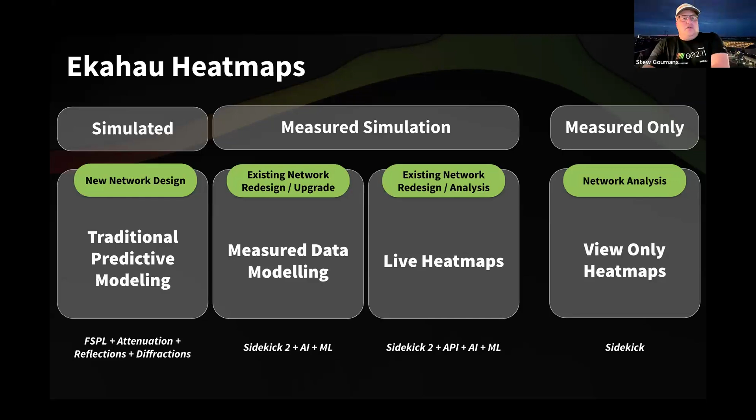So from an AI Pro Online perspective, we're going to cover a little bit about what some of the heat maps are that we got today. Now we've got two views that you can actually take advantage of within AI Pro Online. One is the traditional 2D view, which is super cool. It's got that flat view, the more traditional one you've always become accustomed to.

And then we've got our 3D view, which is even more super cool, right? Where now we can look at attenuation zones. We can look at the height of objects within that area, and then the placement of those APs, and then kind of pan around. And we'll dive into that as well.

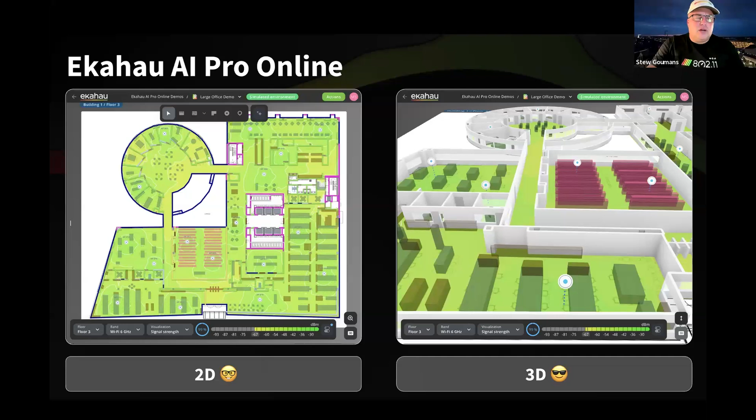Now, here are some of the new heat map visualizations that you'll see within AI Pro Online. Of course, there's our standard signal strength. This is where we're going to see how our APs are performing in a simulated environment, what the obstacles are and what it's going to look like. And you can even single those out by clicking on each individual access point. It shows you individually how each one is performing.

You've got your ever so popular secondary signal strength, which we'll talk about a little bit later in our inspection. But this plays a key role in roaming, right? This is how we make sure that we can actually pass along to the next access point. And our ever so popular SNR, which is our signal to noise ratio, and then our channel interference visualization. So these are some of the key core heat maps that we've got available. But Troy, I think we've got some even more in-depth ones here.

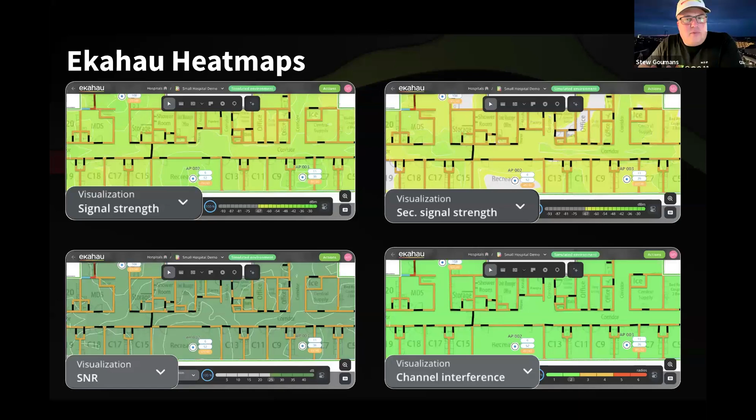Yeah, so we've added a few more visualizations to AI Pro Online. We've added a dominant AP visualization, right? And we'll show you what this looks like in a demo. But the high level concept here is that when you flip to this view, it'll show you roughly the coverage that you'd expect to receive from a particular access point, right?

Each AP's coverage area would be represented by different colors, which also ties into the co-channel interference view, where if there are too many APs lit up with the same colors, that could suggest that you have a co-channel interference issue. But it also shows you approximately the point when you may expect to roam from one access point to another. And that ties into another inspect feature that we'll show you a little bit later in the webinar.

We've also added the capacity visualization, which is super critical to designing modern Wi-Fi networks. It's one of the key considerations you should be looking at in order to deliver on the performance goals and targets for your wireless network. Now, there's a few different ways to look at it, and we'll dive deeper into these. But just to put some earmarks in the wall there, you can look at capacity in terms of overall throughput from a client device perspective, and you can also look at it in terms of number of client devices per radio, right?

And a couple of views that I find management or layer 8 are always very keen to look at. Things like data rate, right? This is the data rate, or the speeds and feeds, as advertised by the access point when you're putting together a predictive or a simulated design. And if you happen to be on site doing a survey, that data rate is what you're actually seeing from the access point.

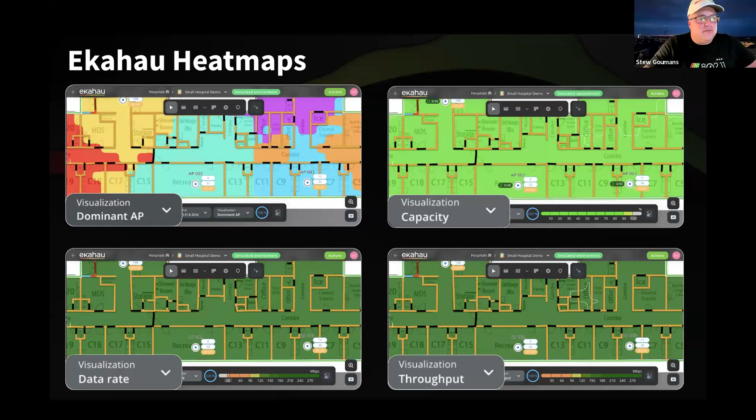Yeah, that's a great point, because as we segue into the tool of predictive modeling, when we look at the coverage, how do the objects play a role in that? It's going to play a role in the throughput as well. It's not just about painting the picture that the coverage is great, but we also have to understand a little bit more about how that free space path loss works, how that signal leaves the AP, right? And moves along that path.

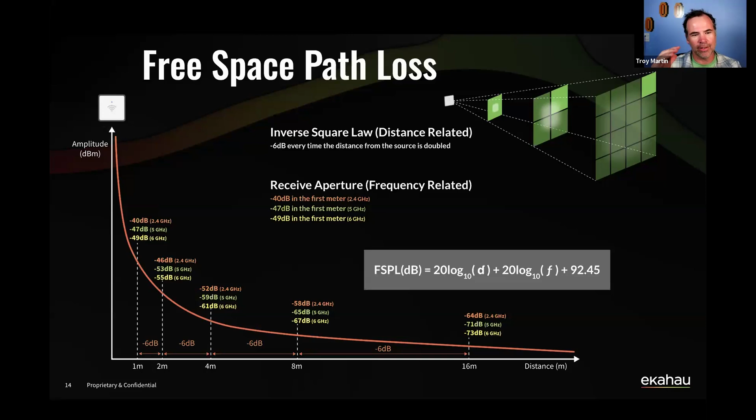Exactly. So there's a lot of deep concepts portrayed in this slide. So I'm going to try to take it at a high level and walk you guys through what's happening here. But the idea is if we imagine energy radiating out from an access point, as that energy propagates, the signal gets weaker and weaker just by covering a distance, right? So regardless of passing through any walls or bumping into any furniture, obstructions, anything in your environment, just by traveling a distance, that signal gets weaker and weaker, right?

And if you wanted to generate this graph via Excel or programmatically using a Python script or something like that, the equation that generates it is on the slide there, and it's purely a function of distance and frequency, right? It has nothing to do with the antenna type, antenna model, the shape or direction. The rate of decay of that signal purely depends on distance and frequency, which are two factors that you see in that formula.

And the other concept that you want to think about is something that we call the inverse square law. The way I like to describe that is if you imagine a balloon filled with air, and you keep filling that balloon with more and more air, its volume increases, covering a larger area. And as it keeps expanding, the material of that balloon stretches and gets thinner, right? So that surface area is being stretched over a greater and greater distance. So the inverse square law tells us that every time we double the distance, each surface area, if we represent that as 1 unit square, receives 1/4 of the energy.

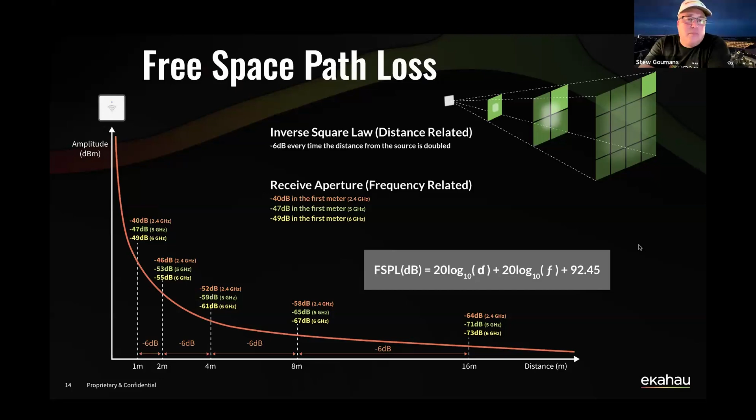Well, it's really cool. I mean, just going back to the calculation in it, we don't expect you to memorize this, but it's really cool that the actual math behind it shows how things leave and how that signal decays. And the effort that goes into putting that into the actual software itself, right? So there's a lot of math behind it, and we can appreciate that. And thanks for explaining that out, Troy, because you talk it all day long from a training perspective. So that was great. I love that.

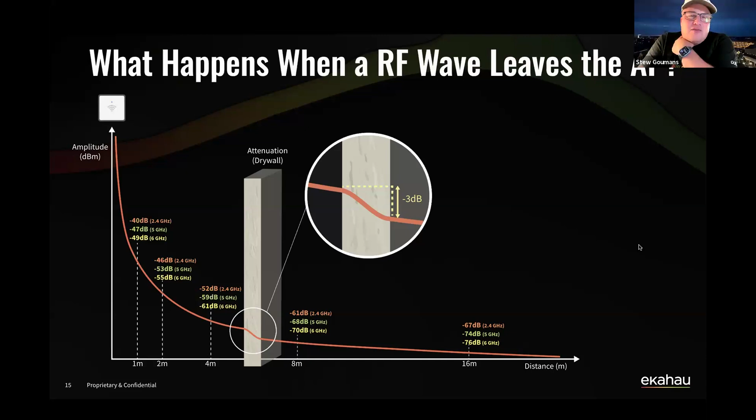Thank you. I mean, when we talk about the RF as well, when it leaves the AP, no two walls are alike, right? Because we have walls that are made of different materials. Some are denser than others, and some behave completely differently. So whether it looks like a standard wall, it may act like an elevator shaft, and it's not concrete. It's got other metal material in it, or it may have water, like a bookshelf.

Believe it or not, bookshelves contain water, because books actually have moisture in them, so there is a bit of a water content. It's not like humans where we're bags of mostly water, right? But no two walls are alike. And that's actually a good segue, I would say, Troy, just to show the overall what that actually looks like. So maybe we should spin over to our AI Pro online here and show you a couple of new things. So let's do that and share that.

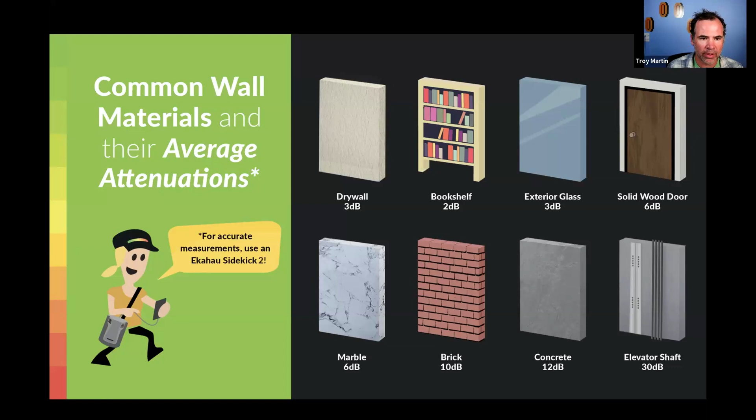Drywall, it's a really wild material. You can have drywall that may be just one layer of thickness, but some buildings they're putting in two or three layers, and you have that on both sides, right? So by default, Ekahau represents a lot of different wall materials. But it's a really good idea for you to go on site and actually measure those walls. Confirm, is that material actually a 3 dB wall, or is it something closer to 5?

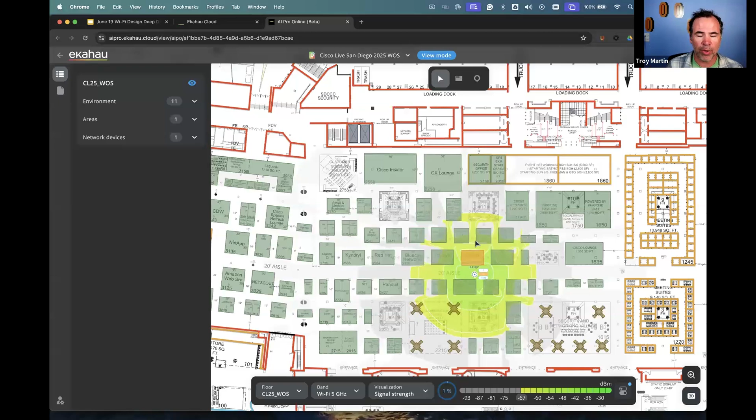Glass panes are very different as well. There's a lot of film that can be put in the glass, or metal that's melted in with the glass itself that helps it reflect the light to keep heat and things like that out. So especially glass panels on outside walls, they can be very high from an attenuation perspective. So it's always a good practice, if you have the ability to go on site, to measure those walls, and then you can use that measured data as part of your design to make it more accurate, make the model closer to the truth.

Speaking of models, what do you have here to show us, Stew? You're right. Yeah, so this is actually a mock-up we had for Cisco Live in San Diego just recently, and you can see you've got all the walls, with the floor plan of the entire World of Solutions, right down to the booth attenuations. Our counterpart Matt went ahead and got this all prepared for us, and hats off to him for getting this ready.

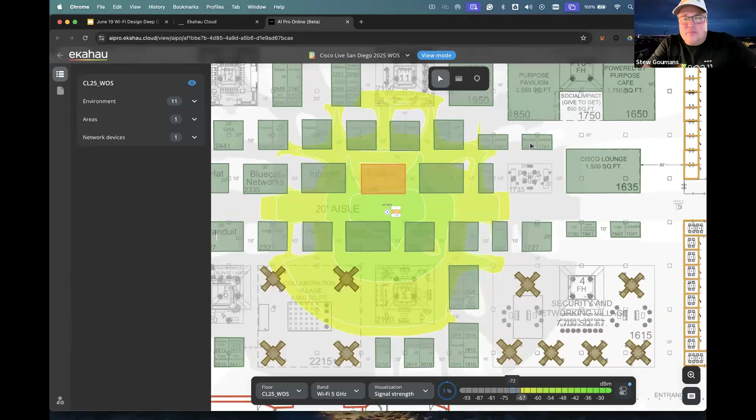But when we look at this, what does it look like from generally putting an access point in there? What does it look like from the attenuation? Let's take a look at these areas, these objects and booths that you can now create. So in this area here, from a wall perspective, Matt's labeled it as a booth, and he's put in some height and some attenuation, just to give you an idea of what to expect for the denser areas.

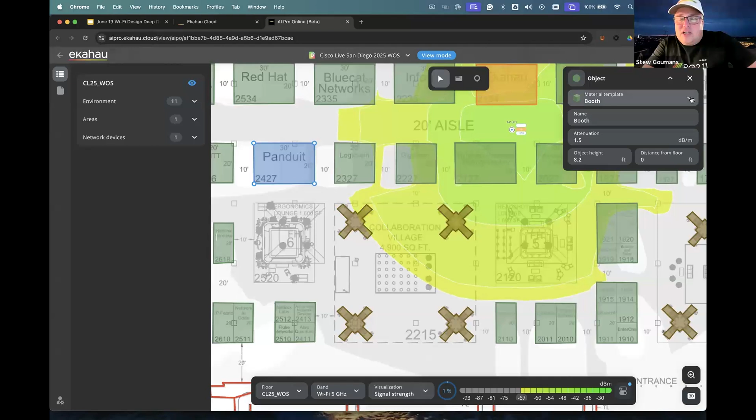And you can get very creative in the types of furniture and whatnot. And with the material template models, there's a number of them here that you can actually change. I'm in view mode, so it's not going to pull it down at the moment, but there are a number of them available to you.

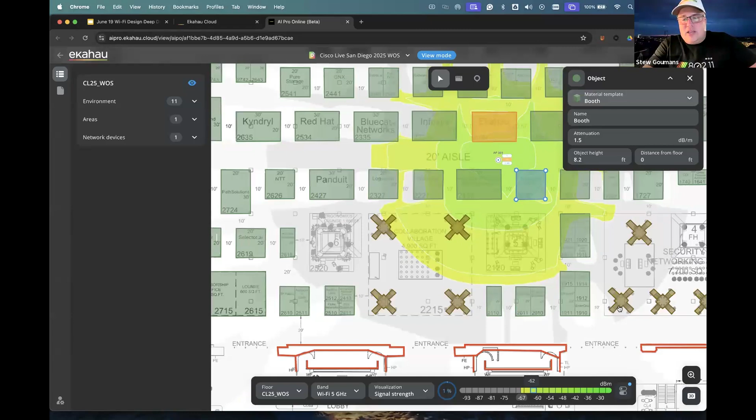So we can get into a three-dimensional view, and this is the fun part: now you can actually see what it looks like with all of those walls in there. We've got the objects for the attenuation, the booths, any doors, and as Troy mentioned, any glass, you'll be able to see that. So it's a lot of fun to see it from a different perspective.

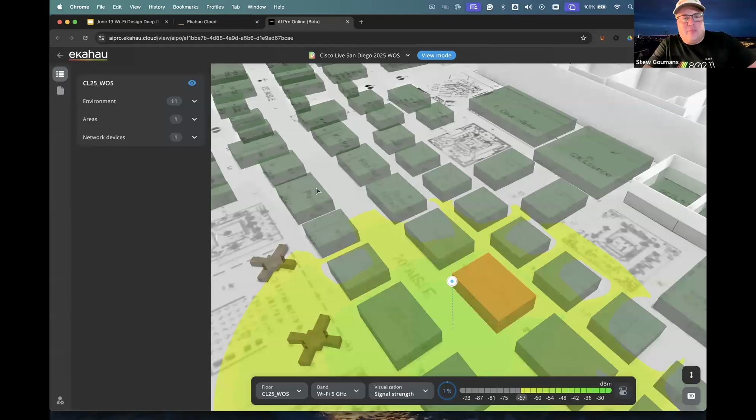And excuse the panning. It is very smooth on my end, but I think it's more just me sharing it over the internet at the moment. Suffice to say, high quality hotel Wi-Fi, right? Yes, it's exactly what that is.

But remember those visualizations? Well, you can still look at them here. What we were talking about earlier, the signal strength, secondary, and of course dominant AP as well. Obviously I only have one on here, so it's just going to show a red map. But you would be able to look at the throughput map, visualize that in a three-dimensional state, and see roughly where it's going to land. Is that 120? As you move along, it puts a little cell there and gives you an idea of where it is on the map.

And if you want to have some more fun with it, you can even drop down an inspection tool within there to see that as well. We'll talk a little more about that in a moment. But that's just a key little thing of the capabilities we're able to do here. All right, so we'll come back to that because I'll switch modes a little bit after. How about we do that, Troy? So hang on.

Get back in. So when we talked about signal strength, we want to cover a few things from the perspective of the walls, which is reflections, the bouncing of signals. RF reflection occurs when Wi-Fi signals encounter surfaces they can't penetrate, causing the wave to bounce back or change direction. The most common reflective surfaces, as Troy was mentioning, are glass and whatnot, and that's how it reflects and bounces around.

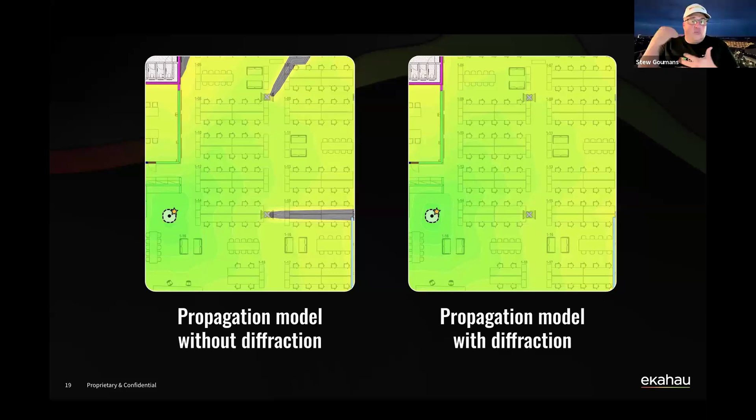Well, the reason we wanted to kind of home in on this is because we actually take into those calculations live within AI Pro Online, where in the past it was a feature to turn on. But we thought it was really important now for our customers to understand, as you're out there designing, what that propagation model looks like without, but also with the diffraction. And it helps better from a planning perspective.

I've always thought that surfers would make better Wi-Fi designers. Whenever I think about diffraction, I always like to think of the movie Point Break, and imagine the waves out when they hit a sandbar. Those waves will bend around that sandbar coming in towards the shore, giving you a great surf to catch, right? So diffractions are really interesting in a lot of your designs.

In the image that you see on the screen here, you could have a shadow that could be an artifact of there being a pillar or a column, some sort of machine equipment, but it's a significant structure that's fairly large. If you imagine standing on one side of a pillar and shining a flashlight at that pillar, on the back side of it you'd have a shadow, right? There'd be less light behind that pillar. That's essentially what you're seeing on the left-hand side in that image.

There's an RF shadow, because the RF energy is radiating out from the access point. It's being blocked, obstructed by that pillar, and it can't get to the backside. And that's the way a lot of traditional modeling would display this and render it and show you your heat maps. But in reality, we have phenomena like reflections and refractions and diffractions, and there's a whole bunch of wave bending going on.

It's almost like I also think of the movie Bend It Like Beckham. I got a lot of movies on my mind tonight, thinking about these things. Every time I see the word bending, I keep thinking wave bender.

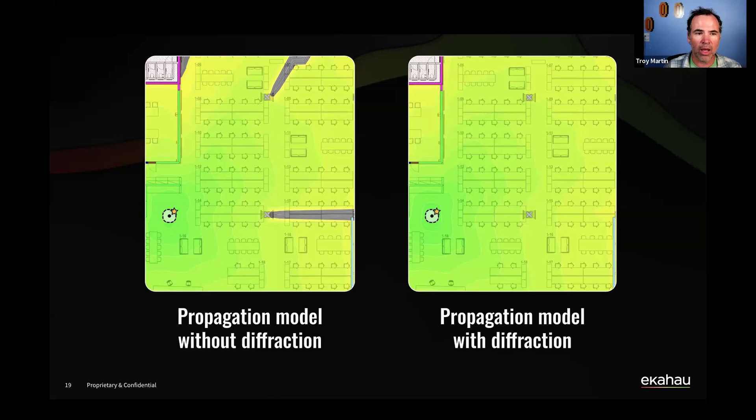Yeah, really good stuff there. I see some things in the chat about how we would define warehouse racks and whatnot. That's a really good point. We'll cover that towards the end in a little bit more of a demo. We'll mock up an attenuation area to show you what that looks like. So that is definitely doable.

All right. So from a primary coverage perspective, we look at the signal strength of the strongest AP, right?

So when we're placing those access points, we're going to look at how that looks from an overall performance piece, right? So here we have AP1, AP2, AP3. And what we're deciding is where does that primary and secondary coverage come into play? Because it's important that we know that, okay, the closer we are to one AP, and where the sidekick is closer to AP2, it is going to be -59. And that is the primary piece. And that's most likely with the client. If the client was right beside me, it's going to latch onto it.

Now it's going to want to hear that minimum level of -67, -68, that sweet spot. Yes, that's going to be my secondary AP. And so it's going to make a choice. And then from a third perspective, or I guess I should say, Troy, I think we used to always call it the tertiary, but it was more of just that next AP, right? We would use that in our RTLS planning days or location analysis, right? So that's when we really get into that part.

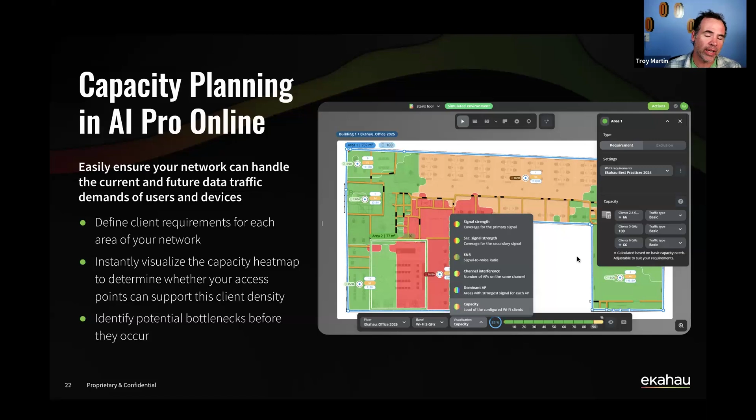And we have the visualizations within Ekahau that allow us to see, when you start placing access points on your floor plans, you can then set thresholds for how many clients you want to limit per radio on the 2.4, 5, or 6 gigahertz band, and make sure that you're still compliant. And if you're not, you have the ability to start adding access points into that design, while always checking back to make sure that you're not accidentally breaking co-channel interference within your models.

Which again ties into the fact that one heat map on its own won't give you your complete design or your complete analysis. You need to look at how all the heat maps relate to each other as part of a collective set of information and visibility into your Wi-Fi project that you're working on.

Yeah, that's a great segue into how we look at that from a design perspective. So right now you see that new feature for the inspect tool we have in AI Pro Online, and that really plays the role of understanding where the thresholds are met from a capacity perspective and primary and secondary signal strength, and really helps you out from a design perspective. And it's a really good learning module for it.

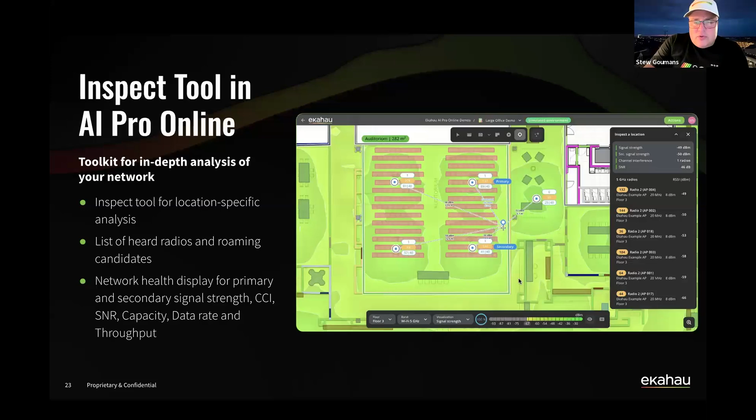I'm going to go ahead and bring up the actual AI Pro Online here so we can have some fun with it. I'm going to start with a fresh one here. There we go. This is actually the same map, but what you could do here is place walls. I can actually let the thing do it for me if I wanted to. It'll actually build out some walls, and if I was to build the booths and things around it, it can definitely do that for me.

I'm not going to let it do the whole thing. I just canceled it here, but it's going to place some walls in here for me just to have some fun. But if I was to say, okay, let's build up an attenuation object like we did earlier. Let's put that in place, and we'll just draw a box here quickly.

And oh, hang on, I did not click. I don't have my mouse with me today. There we go.

Then you can actually change it, right? Remember we talked earlier about how you can add different materials and different attenuation objects. We're going to add a few more of them in here, of course, but you can always add your own custom one. There are some that I'll see if we can get put back in here, like foliage and some outdoor stuff, because they can become helpful.

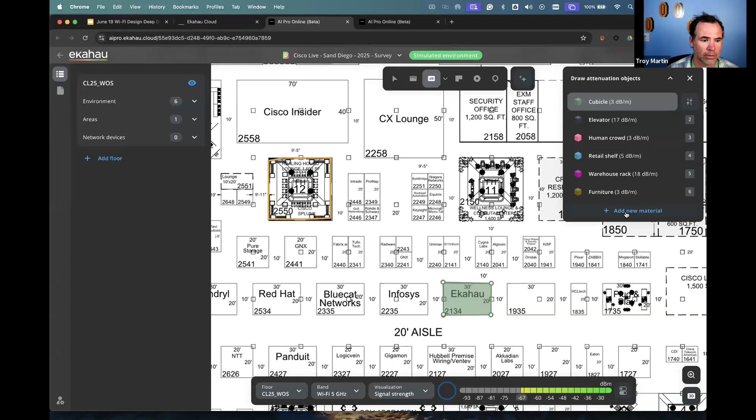And even in today's buildings, there are lots of indoor parks, right? There are indoor trees. Even cruise ships have little central park areas. So it's not really outside, it's inside, but it does have a different factor to it.

So you could actually draw something. Say this was a tree, I could draw the tree around it, right? Make sure I can draw my polygons here properly. There we go. And I could say that it's a tree, and then I can adjust the height of that tree as well, and the footprint of it. So that would be something that you could do.

But then when you're placing access points, as Troy mentioned before, if you have the generic access point here, I think we even have the standard Ekahau one. There we go. Got our Ekahau APs, and we'll put that in place.

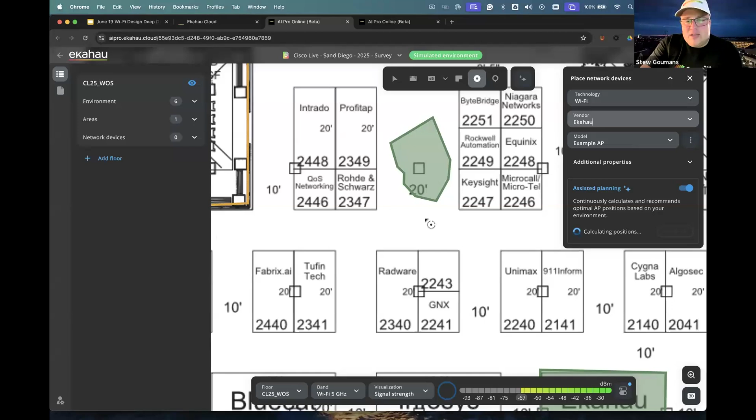But as we put an actual AP in here, and we have some objects, there's that reflection and diffraction in action, right? It's showing you what it looks like as you place that around. And you're going to go ahead and place another access point in another specific area. And this is where it then becomes that inspection tool. It's like, okay, where are we on this map? And where's my primary and secondary?

And then what's the height? I can change it. It's showing it here in units. So let's say it's 30 feet high, right? And is it distance from the floor? Is there a height between it? Now we're seeing how these points themselves are going to show around those areas. And it gives you more of an understanding of the planning.

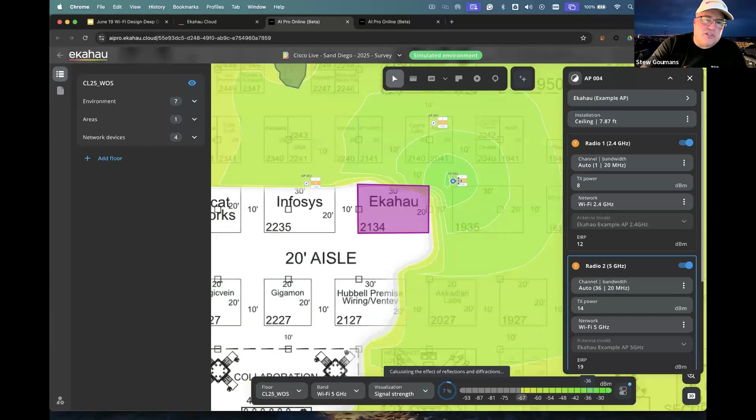There's that shadowing, right? Troy, it's like that. We're talking about those reflections and diffractions, but this is the real stuff, right? And where APs are. Now, if you start placing these APs at different heights, then it comes into that calculation as well. Well, now we have to change that. Is that a wall mount? Is it ceiling mounted? Is it directional? And this is where you can actually change that.

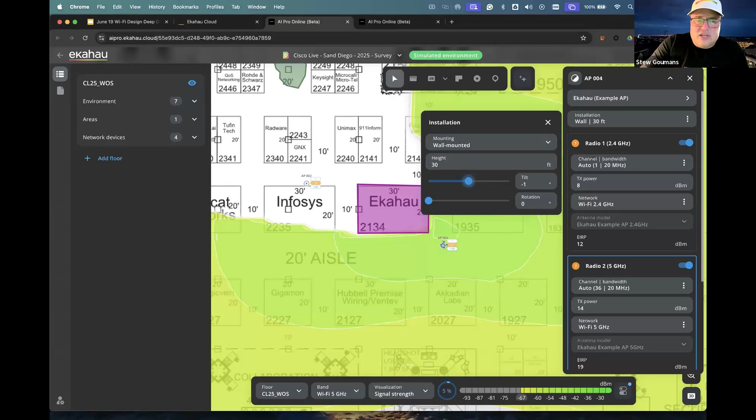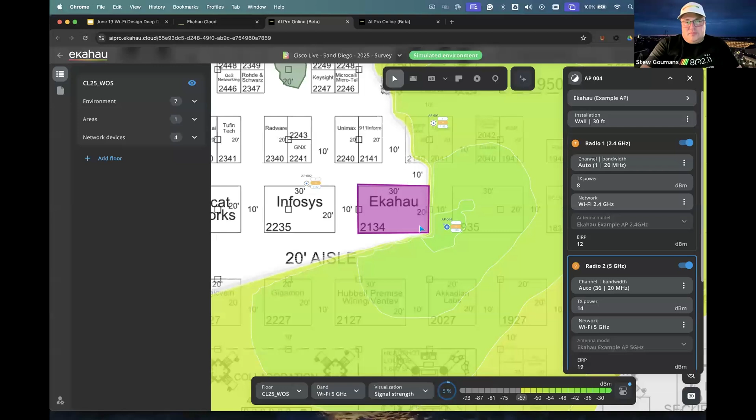Obviously, this isn't where I put it, but if I change it to like 30 feet, then I would actually have kind of a down tilt, right, to that. So now you can see where I can actually place the antenna, and does it make a difference? How does it project in there? So there's a lot of cool ways you can look at the visualization of the height of the device. So you're at 3 foot level, the AP is at 30. Well, this is what you're going to see from that in the inspection piece. And that inspection tool is really powerful.

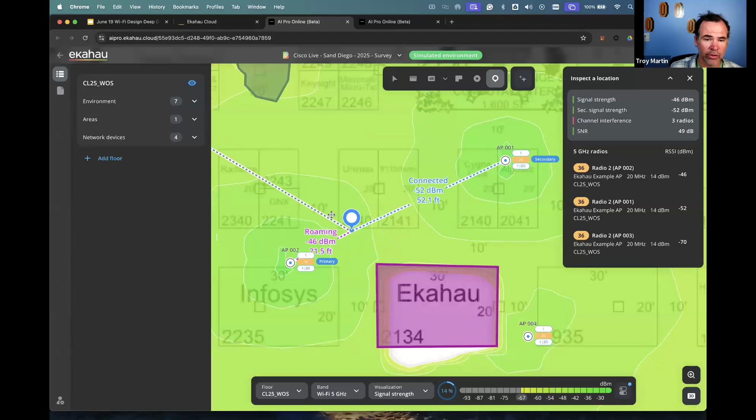I think that if you drag it across your floor plan and mimic the path that a person would take to walk, if they're walking from their office to the kitchen area, or from the stands to the concession area, follow the path that person makes, and then see which APs they're going to connect to. Are they going to roam in natural roaming spots or locations that you think could be beneficial to the roam? Would they hang on to access points? Would they roam too early?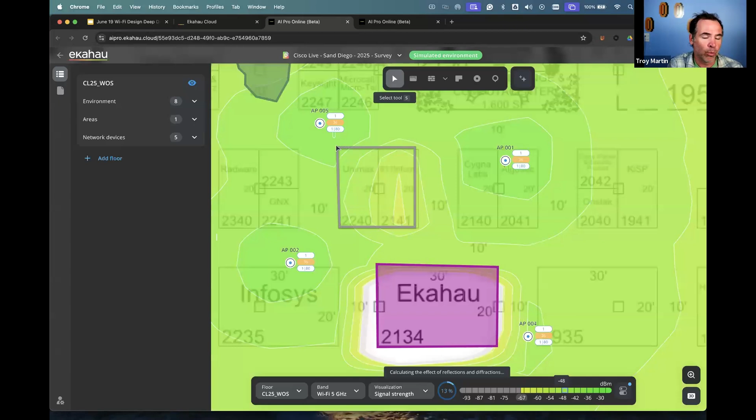By using that inspect tool, you can simulate or mimic the path that your users will take through your environment and just double check to make sure that there's going to be the roaming that you expect as part of your design. And if there isn't, this gives you a chance to reposition your access points, modify your antennas, adjust your tilt, like Stu was explaining; you can change your design. That's one of the things I really like to use this inspect tool for, just validating that if I pretend I'm the person walking through my environment, what will my experience be like?

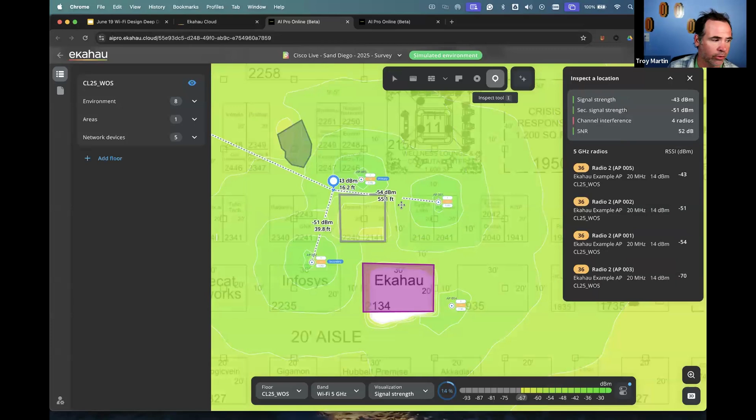Yeah, absolutely. And it gets even more fun, not from a design perspective, but let's say that you went in and said, well, I need to look at it from an actual, right? What does it look like from an actual measured environment? And those are things that we can do, right? We can show that. And that actually really shows where the gap is, from a roaming perspective, and also from that calculation of capacity.

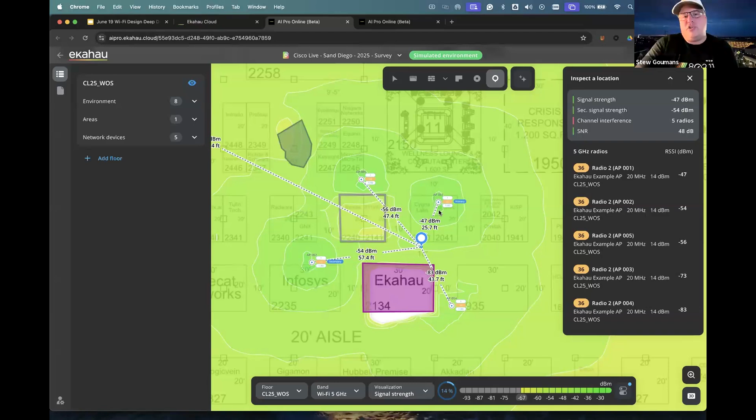So I'll bring up another quick one here just so we can see it. And this is actually a real environment. It shows you the power of the data you can get from the Sidekick, but then it'll say, okay, well, what was the actual from those access points, right?

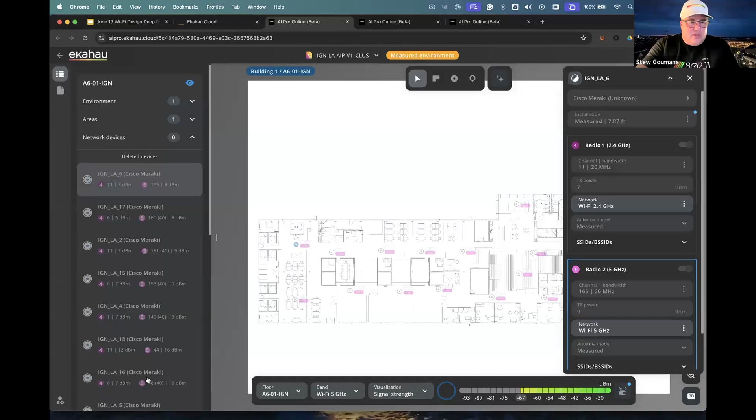And then it'll put that in place. There we go. Excellent. So in here, I've got a number of devices, and I'm going to go and reset it to the old one. I was doing some fun, and that's actually a cool thing we'll touch on in a second: you can actually look at a greenfield design and then replace it, right? So let's go ahead and restore those devices.

Now this is the actual, all measured data, and you can see that there's a floor plan here. There was a survey that was done. You can see where all the APs are behaving, how they're working themselves around all the offices and all these attenuation objects. But what gets really cool is when you look at that

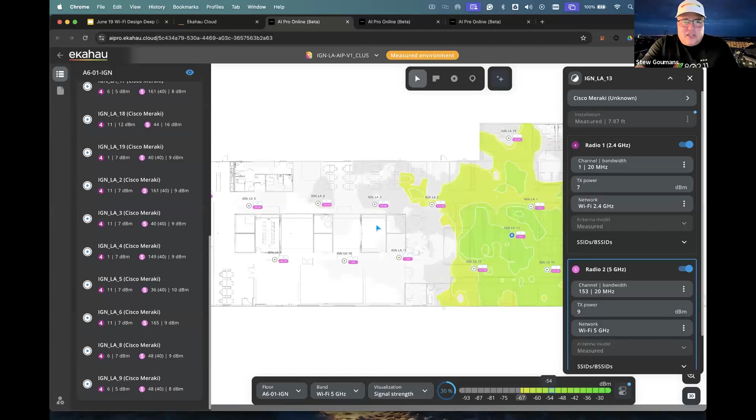Let's move this column over here. Get this away. Hang on. Let me just move this off here. Oh, I think my screen has shrunk a little bit. I can't move that off. Can't close that window. There we go.

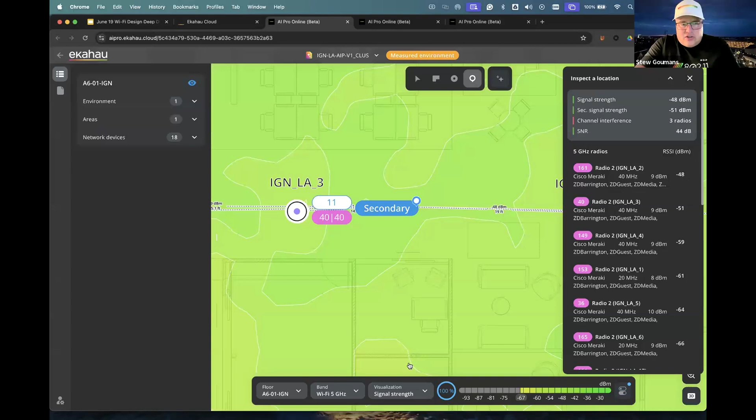So now if we go from an inspect tool, and as Troy was mentioning, if I'm walking in this area, I'm going to turn the signal strength off from the heat map for a minute because I don't necessarily need to see that. Where it gets really interesting is I'm a person walking from this door. While I'm standing here, I'm hearing AP number 12, 2, 1, 3, and 4, and these are the signal strengths, all in the list of the columns.

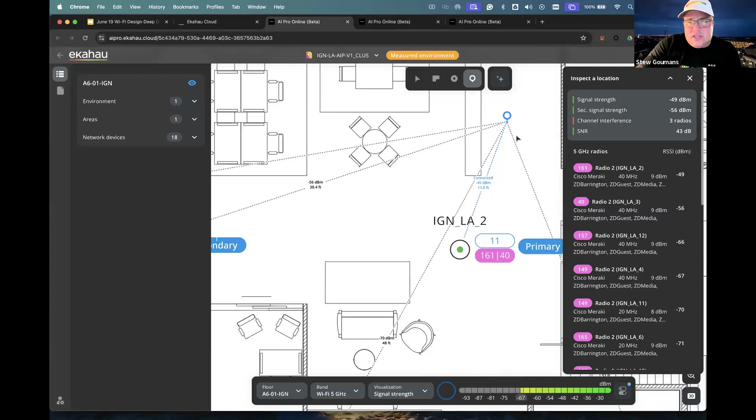What's important is that as I'm moving in this environment, I'm connected to that AP. It shows you're connected to AP2. That's your primary, right? As I move along in that walking path, it shows where's the next one, the secondary, and when is it going to roam. So I get over there, and then it's roamed, and you'll see it's highlighted right there. See, this is roaming. So at neg 48, 17 feet, that's generally where the roam is going to happen.

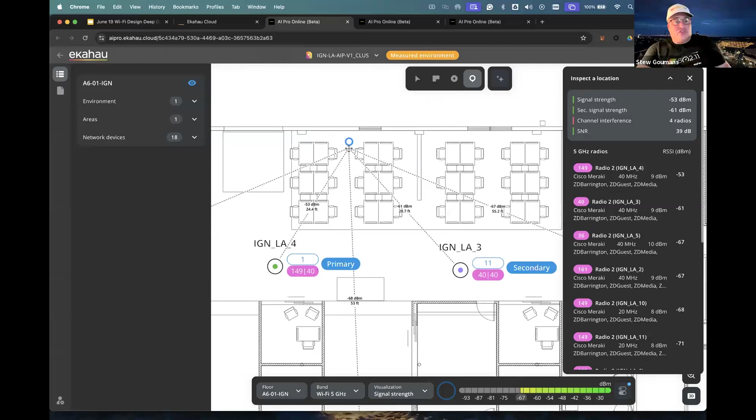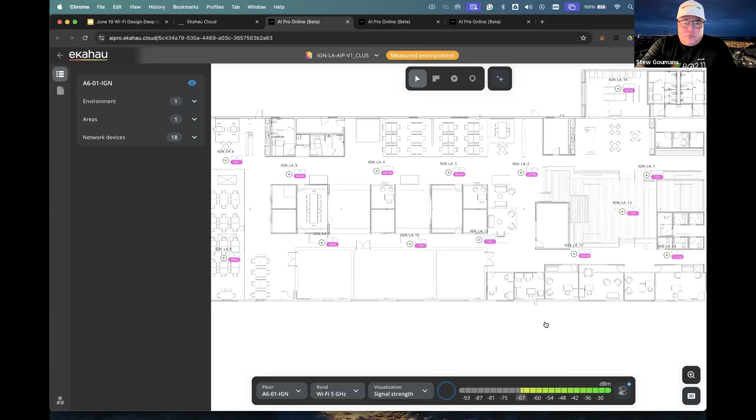So it's a very powerful tool, and it's all based on the Sidekick data. When you survey, I surveyed every little nook and cranny in here. Wherever people are going to use Wi-Fi, that's where you survey and grab your data, to understand where things will lie. Now you've done that quick survey, and maybe we're going to upgrade our access points. We may even want to look at offsets as well, for the type of devices we want to use.

But let's say we want to change those APs out. We certainly can. We're going to retire these older MR34s, I believe it is, and put in some cool 9170s. Let's do the 72s here, Cisco, and go into the 9170. Is it 9178? So now I've done it. That's it. All done.

This is fantastic for those scenarios where you want to reuse your existing cable drops. You don't want to incur the cost of running new cables. Maybe it's cost prohibitive, for aesthetics reasons, whatever it is. If you wanted to see what a one-for-one swap would look like, that's exactly what Stew is demoing: swap those APs out, use the exact same drops, and confirm with that new model, that new refresh, are you going to get the coverage that you expect?

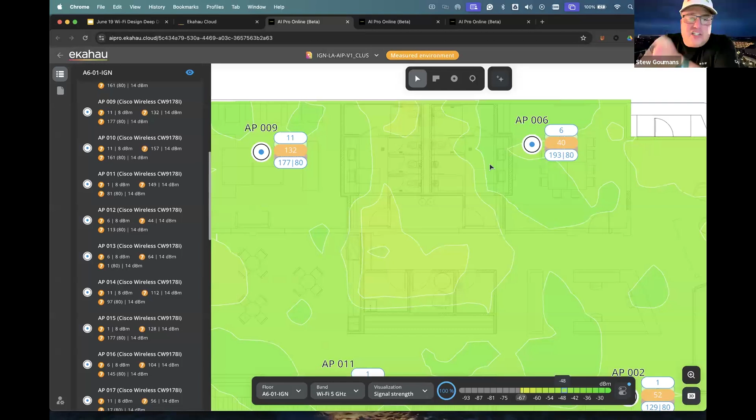Yeah, and it changed the channels right away. It took a second as I placed the APs, and then it started massaging the channels and understanding what was to be expected for this environment based on that Sidekick measured data. That's where you get into our secondary signal strength, channel interference, dominant APs, whether it's in 2.4, 5, or 6, and then our throughput as well.

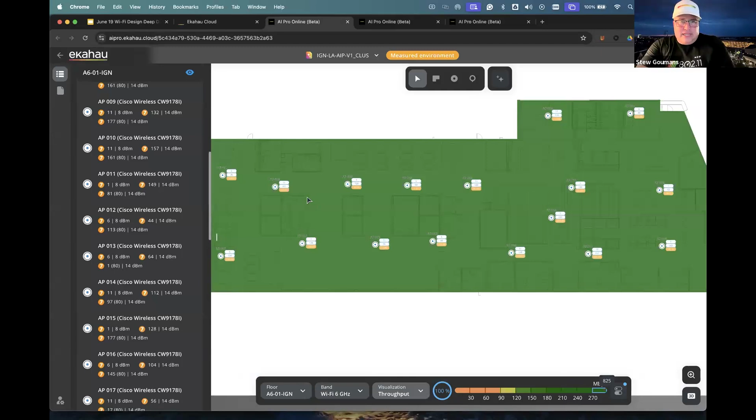Now, if we go back and look at the incumbent APs, do I have good signal strength in the secondary? I may have. Did I have channel interference? I certainly did. So this network can use some help in optimizing. Yes, we've got a button for that. We can optimize just the channels themselves to help in the meantime, while we're in the middle of an upgrade.

Yeah, so inside Ekahau, we're proving that there's a valid channel plan that you can use. If we can get it to work in Ekahau, we can mirror that configuration in your Wi-Fi manufacturer's controller or their management dashboard and set them up for success, right? But if we can't eliminate co-channel interference inside Ekahau, mirroring that configuration in your Wi-Fi network is going to cause and contribute to co-channel interference. So we're just proving that we have a valid, successful design, and then just mirror that configuration as you go to deploy.

Yeah, and even that next step is, well, maybe we already have a network that we've measured, or maybe we've designed, but maybe we want to connect to a live network. Well, we've got a button for that now. So in this case, we've detected that we have a Cisco Meraki dashboard or a Cisco, I guess you now can call it Catalyst Center. We can now connect that live network.

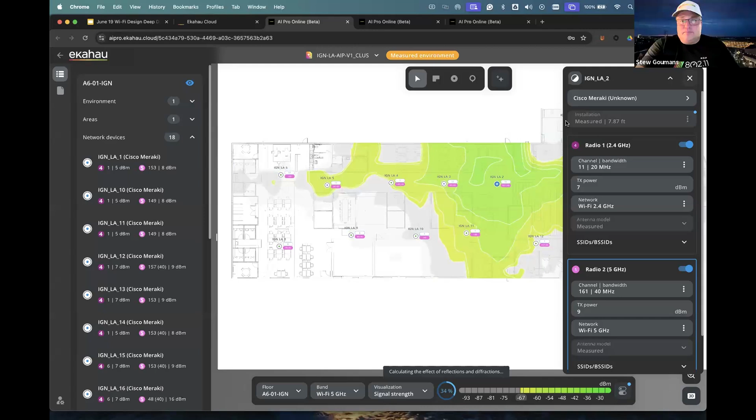All right. Well, I think we're just wrapping up here with about a minute and a half to go, Troy. But I think we pretty much covered some of the cool stuff that we did from a design perspective.